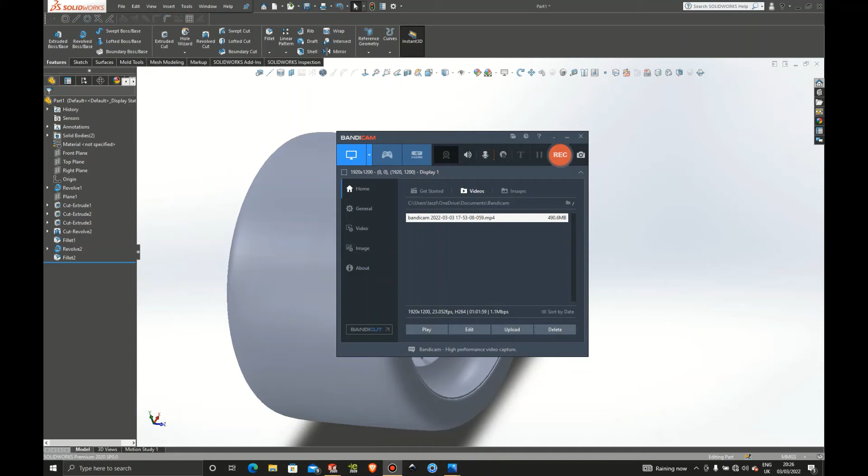All right, so let's continue with our rims and wheel. We now created our racing wheel. We still need to add some cuts on these tires to make it good. So let's get a section view here. Press OK.

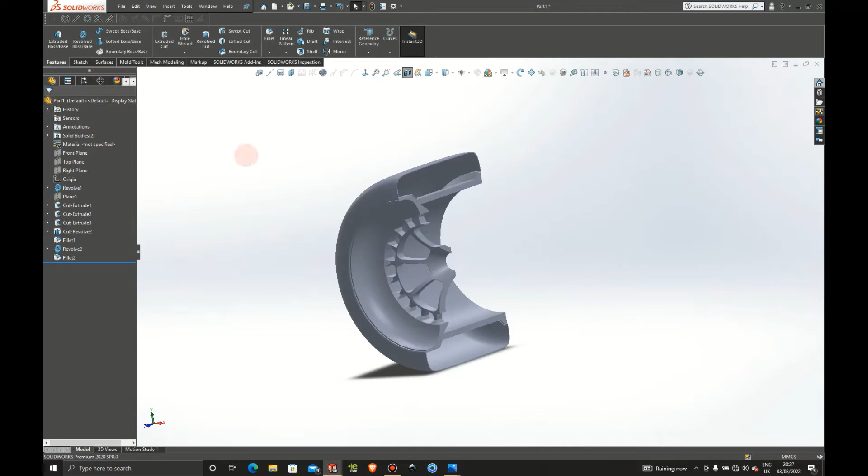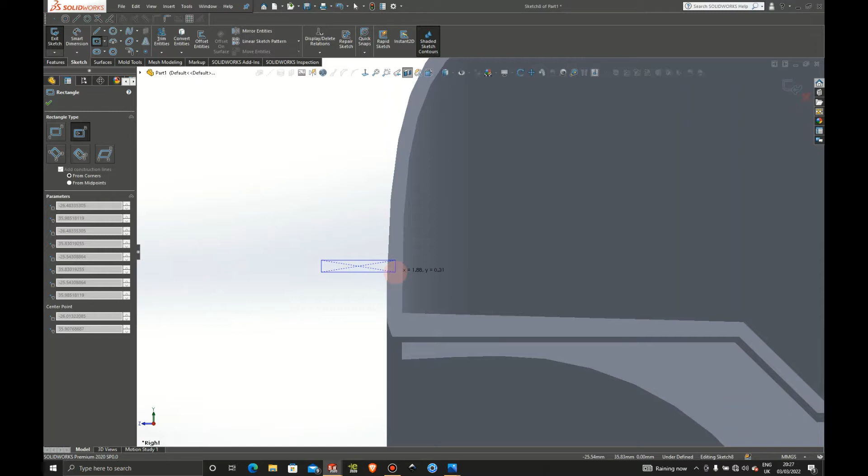Let's make a sketch on the right plane, normal to profile. We're just going to zoom in here, and then we're going to add a couple of center rectangles. We will cut into these wheel here.

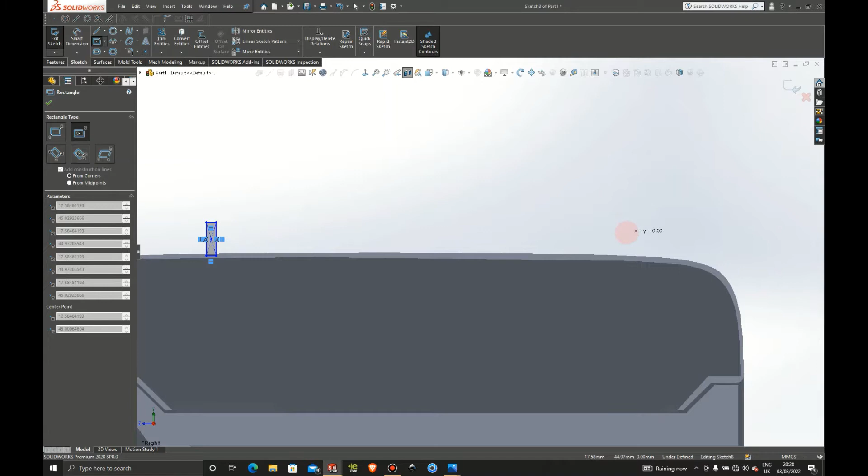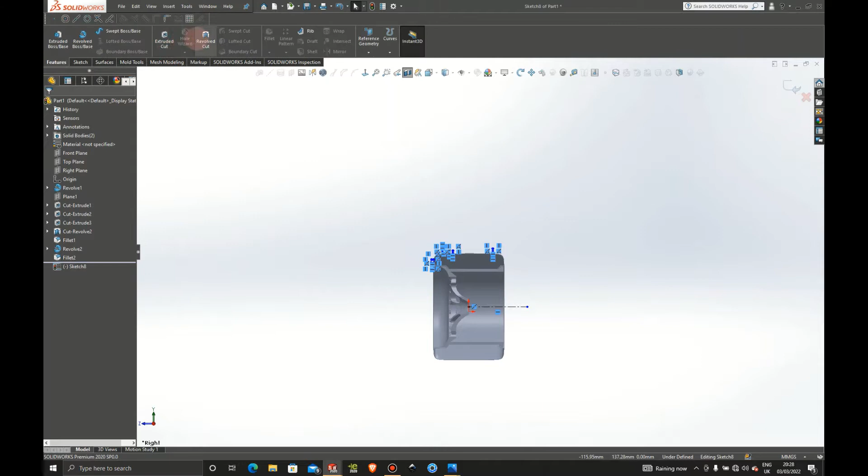And of course we need a center line to revolve this around, and a revolve cut. So let's go to features, to a revolve cut, and let's use this as an axis. All right, and if we take away the section view, now our tire is starting to take shape a little bit better.

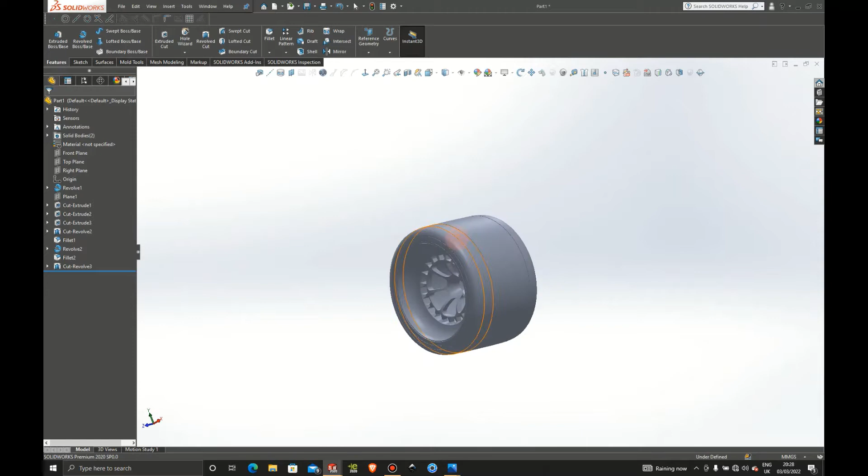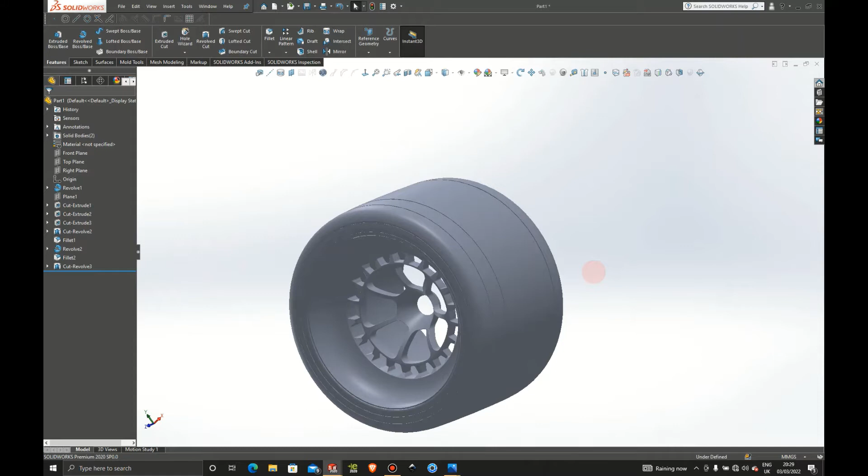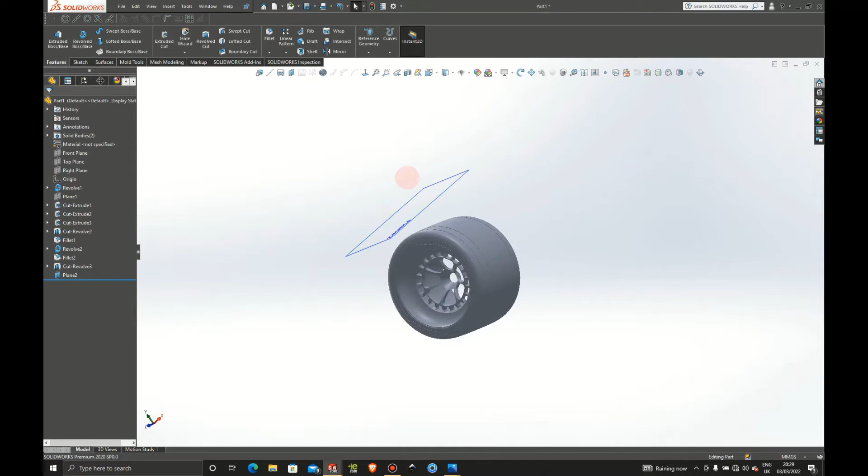All right, now we're just going to have to make some cuts that are going in this direction. To do that, what we're trying to do to create that kind of cut is make a sketch from the top plane. Actually, we're going to make our plane out of the top plane, somewhere there. And then we're going to make a sketch on this top plane.

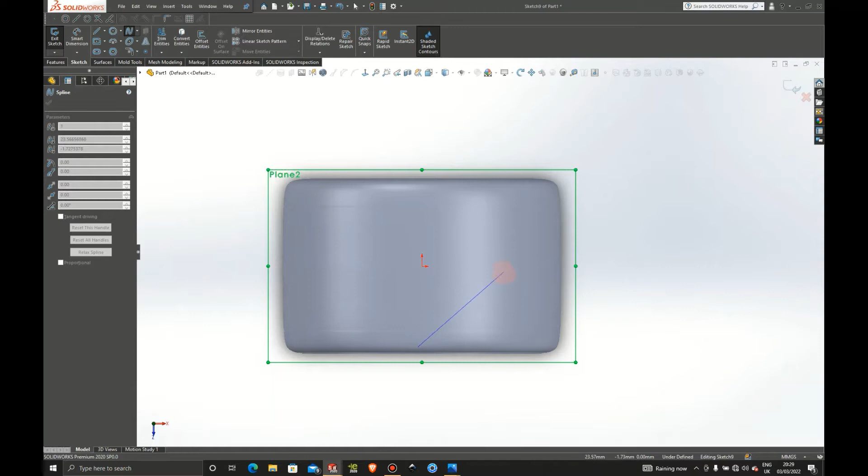Okay, let's grab a spline from here. That's the midsection, the middle right here, so a little bit away from the middle like that. And we're going to give this a little bit of profile. Then we're going to grab another spline and connect these points, following this same curvature in that direction.

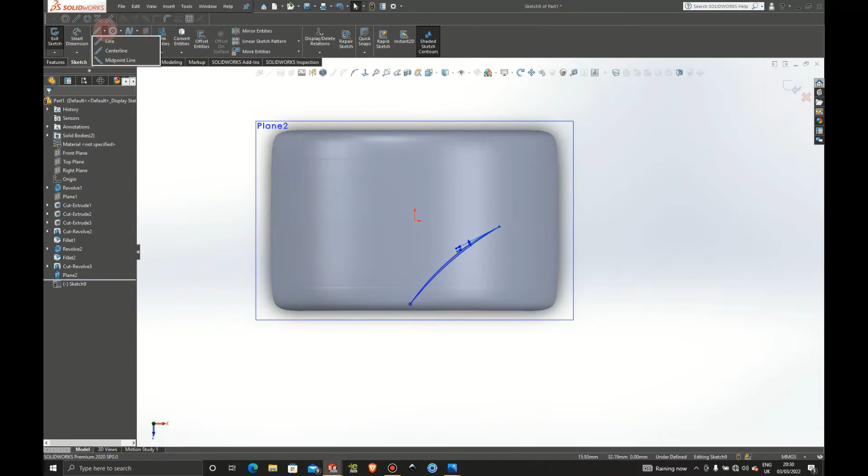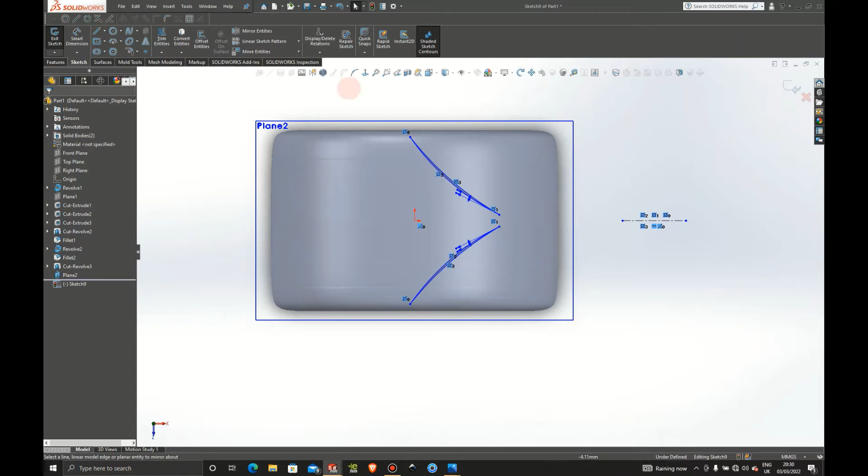Okay, and then I'm going to take a center line here. I want to drop it right on the center, and mirror this over to the other side, and mirror over here like that. Okay, and then we're going to try and do a deboss, hopefully. So insert features. But first, let's exit the sketch.

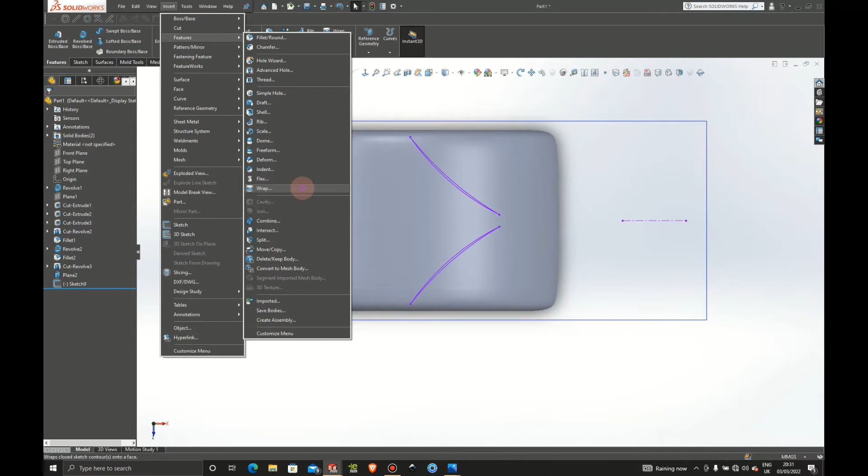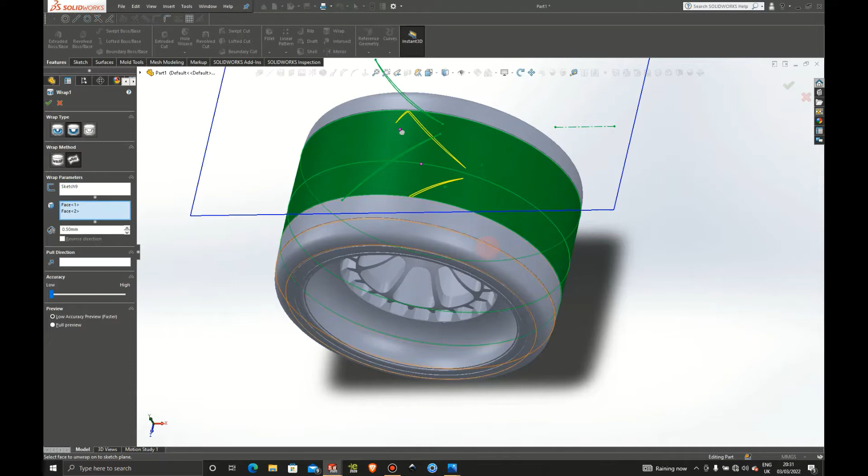Okay, now let's go to insert features, and then we can use a wrap. Let's select the sketch, it's going to be those sketches, and we're going to select deboss here. Our face is going to be the core itself, so let's just select all faces.

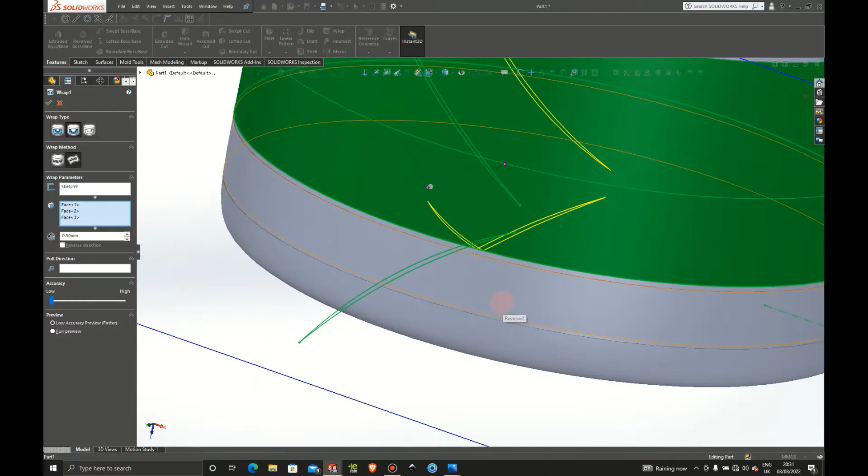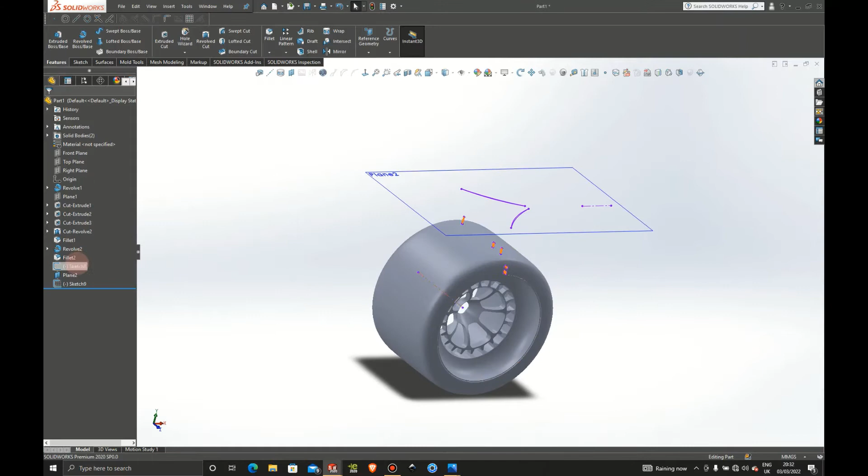Actually, we need to cut this groove afterwards because it's giving us some issues here. So let's go back into the feature tree, and we have this Revolve Cut here. We're going to delete that. That's good, and we're going to delete it. We'll probably leave the groove cutouts for now.

And let's go back again to insert features and wrap. Let's select our sketches, and let's select the face, the two faces. All right, and we're going to deboss that by 0.5.

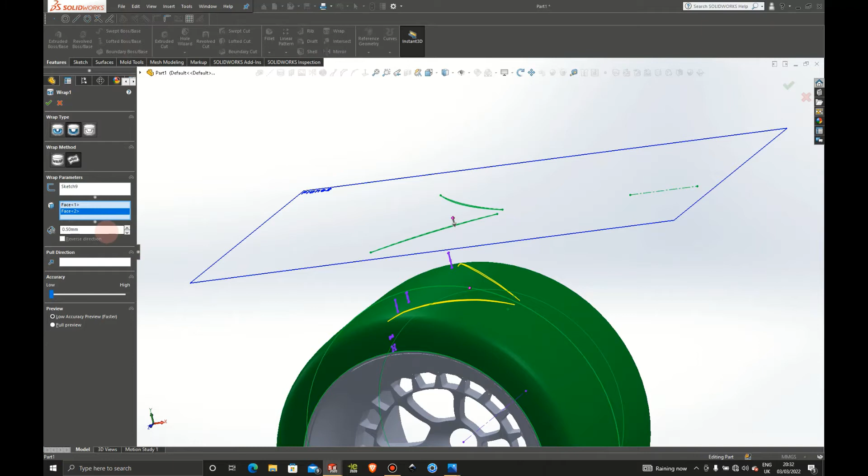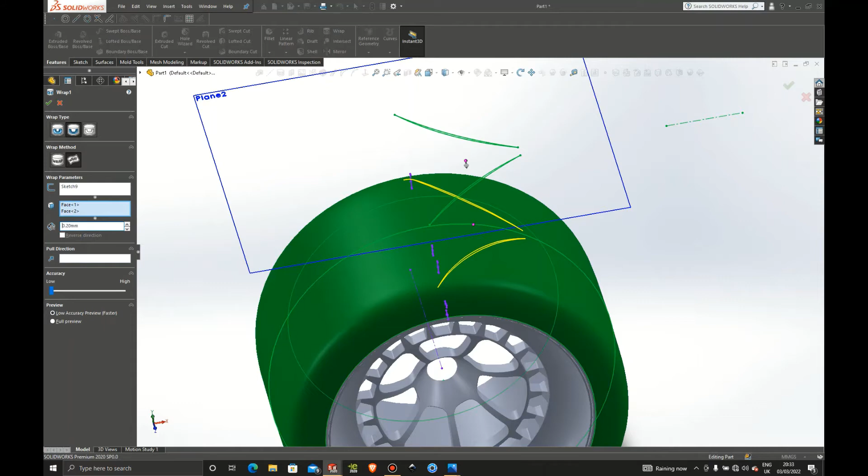Okay, let's have a look at this cut. So it looks like 0.5 is cutting right through the tire, which we don't want. So we're going to go back in here and edit that feature, and we're going to make that 0.2. Have a look. All right, so 0.2 looks perfect on that cut.

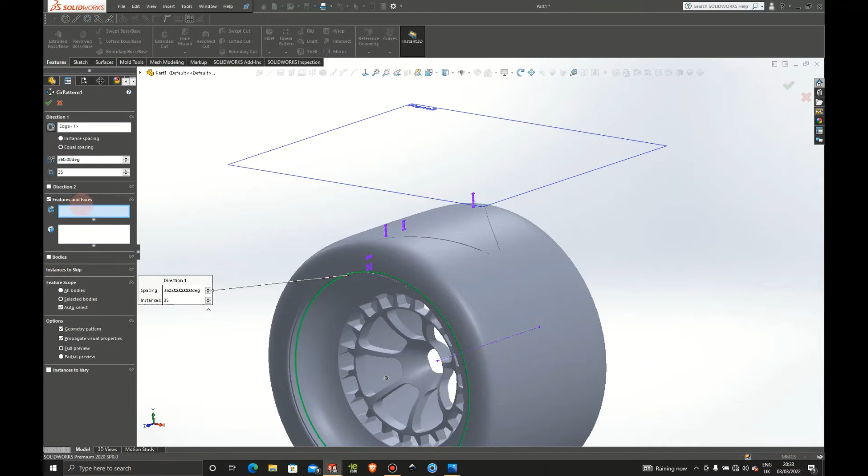Right, then all we're going to do now is go to circular pattern here, and for direction we're going to use this circle, or one of these edges. Clear the selections, and let's choose these cuts here, selecting from the feature tree, the wrap. So asking for 35 instances, and I'm hoping that is going to do it.

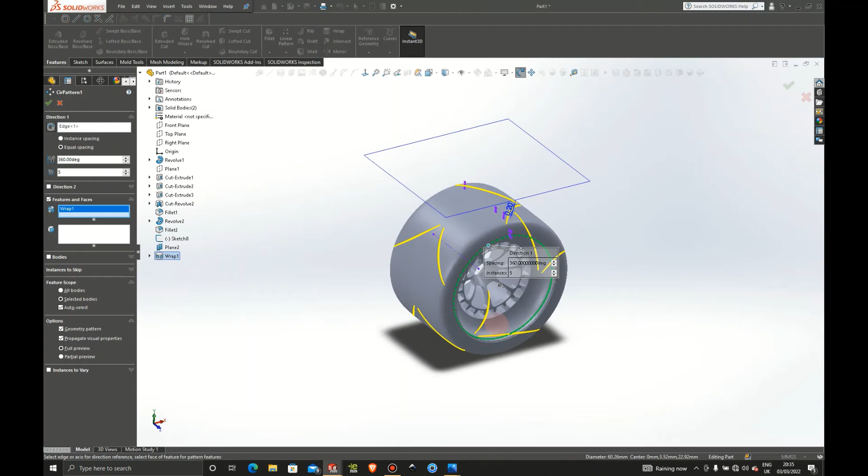All right, so if we choose 4 here, then we're just going to bring these instances up. So I want this to do more than 5, but I don't know why it's not doing more than 5.

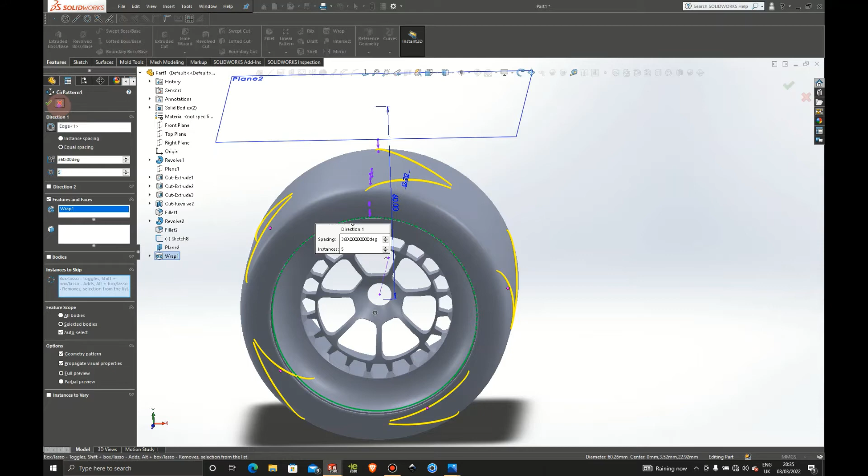So let's go do that again. Circle pattern, direction is this edge here, or this edge here. This edge, let's bring that down to 4. And for features, it's going to be the wrap. So it's doing 4 here for us. Press OK on that.

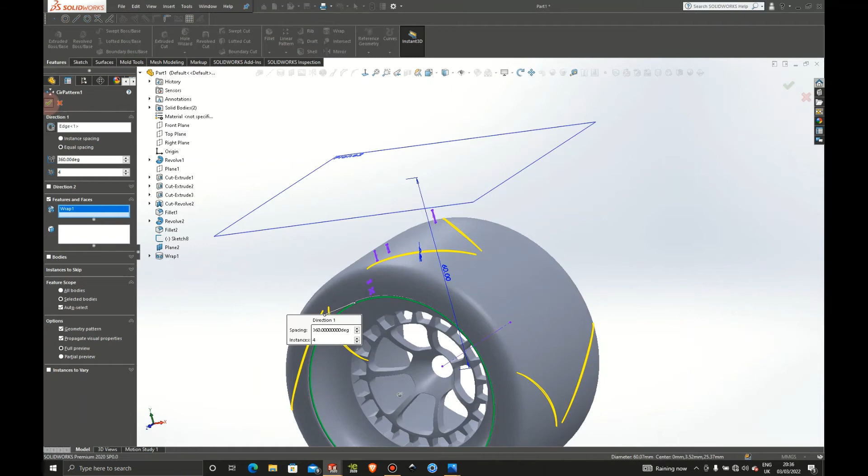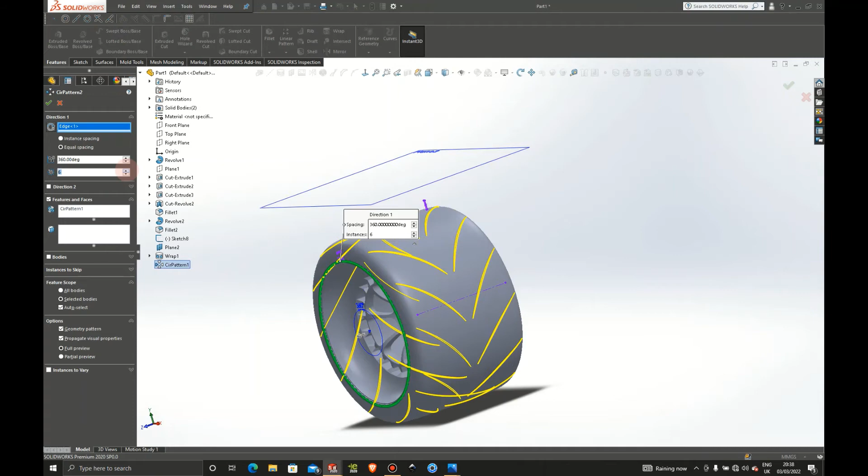Let's go back in here again and try to do it again. So let's select this. I want more than 4, but oh, there you go, that's much better. So now we have a lot better instances here. Let's try 6. All right, so 6 is the one.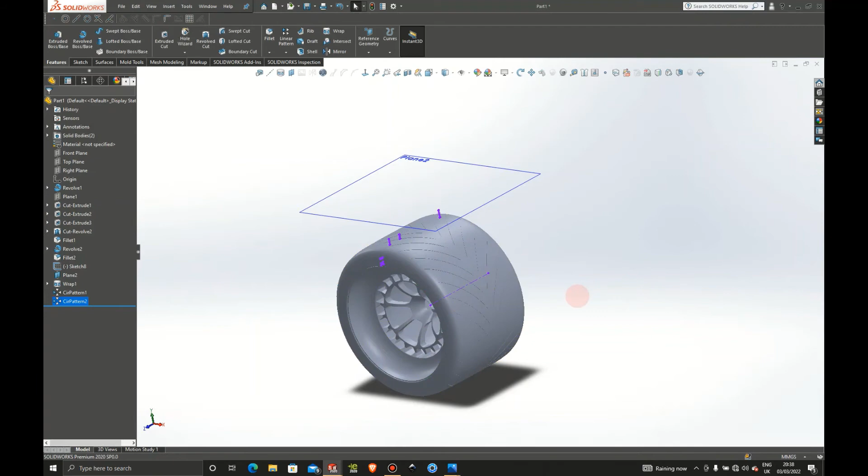Let's try 7 instances. Okay, so 7 looks a lot better. Press OK on that. All right, so now it looks a lot better, a lot more like a tire here.

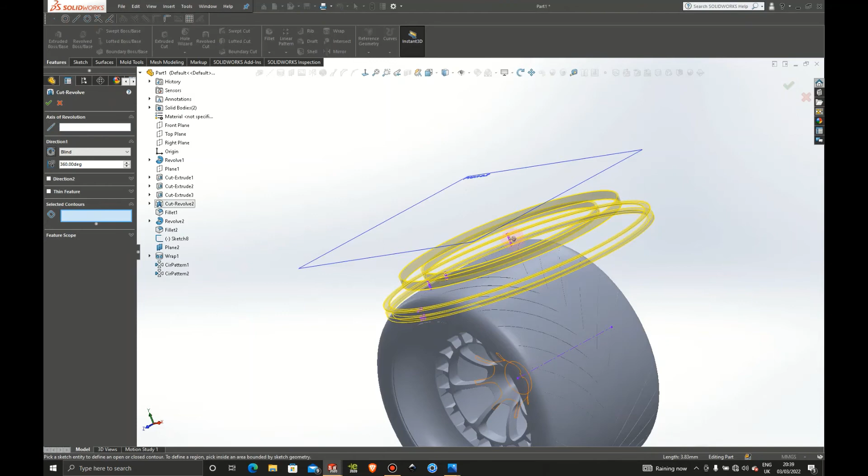And then all we have to do now is, again, we're going to revolve these around. So let's do a Revolve Cut. Let's select the sketch here. And axis of revolution, clear selection, and select contours, the contours being the sketches itself.

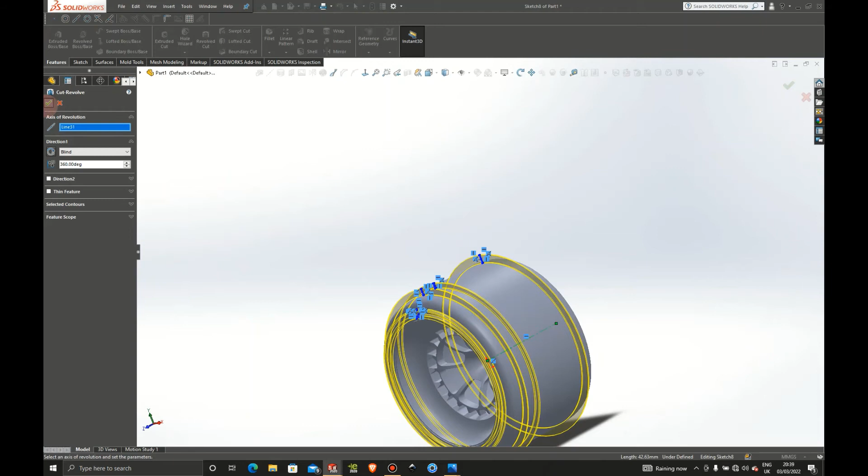Oh, let's do it this way actually. Let's go in here and edit the sketch. Okay, then let's go to features and do a Revolve Cut, and let's use these as the axis of revolution. Perfect, okay, so now we have the grooves and we also have the cuts on that wheel.

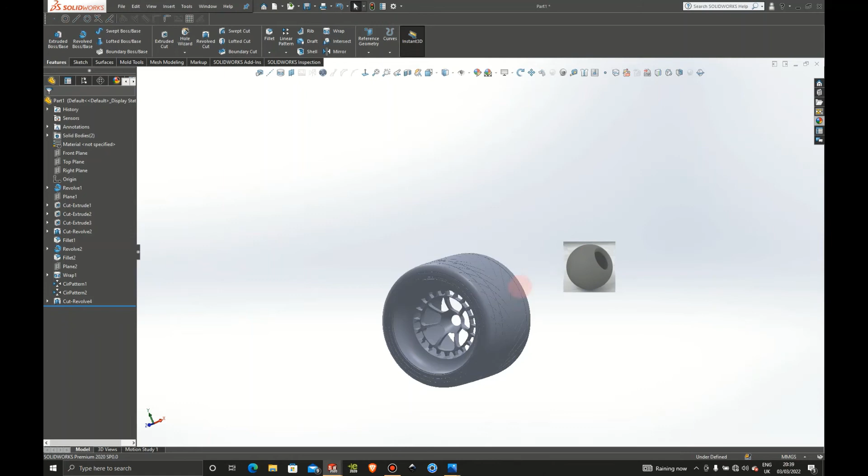And then all we have to do now is hide this plane here, and let's add an appearance. We're going to add rubber, matte. I'm going to add that on there. So that looks beautiful.

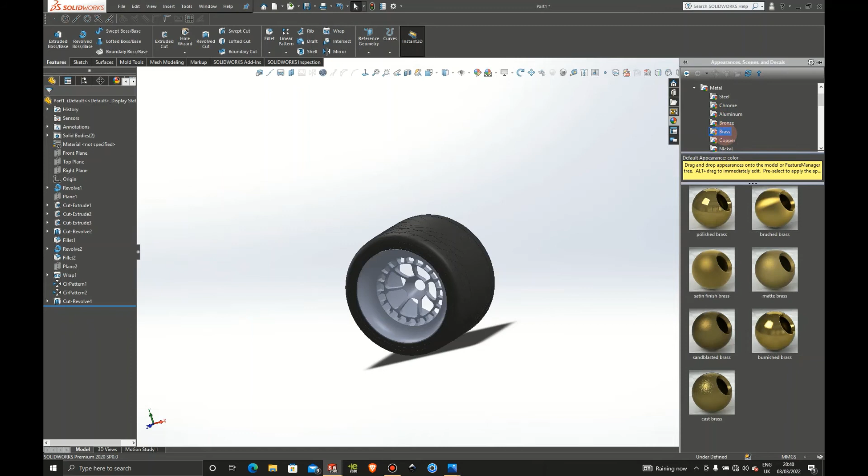Okay, let's add an appearance on the rims. Let's add, not plastic, but metal, right? And let's try chrome, maybe bronze, brass. Let's try brass chrome here. All right, that looks pretty good on the rim.

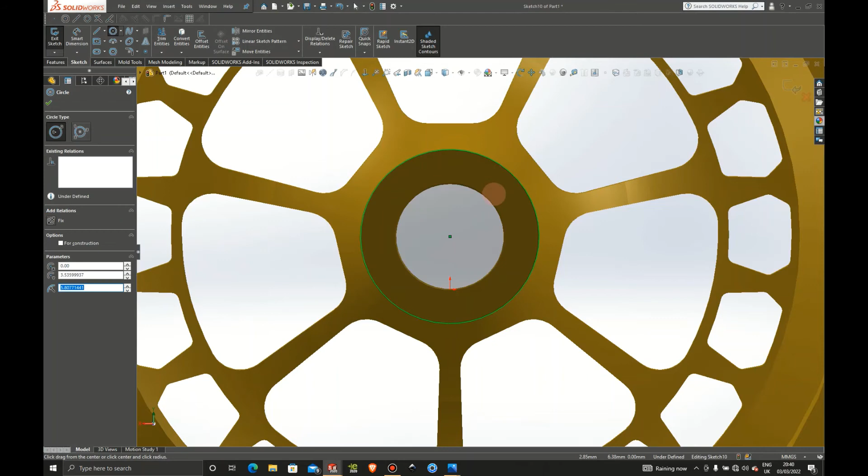Okay, and I just want to make this a little bit thicker here, so let's make a sketch here. Features, extrude. I want to give this a little bit of thickness, and make that maybe just 1.

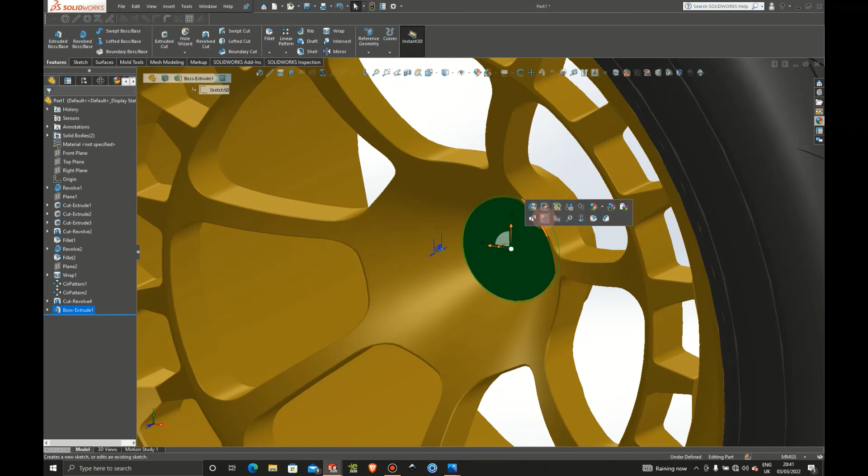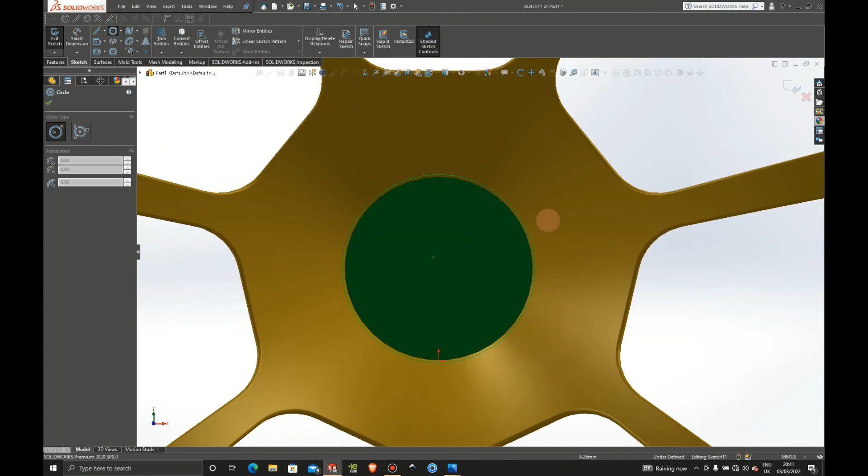Okay, and then we're going to make another sketch on this face, and let's cut that out. We want to find that center point, of course. Let's try to find that from this side. There you go, that's the center point right there.

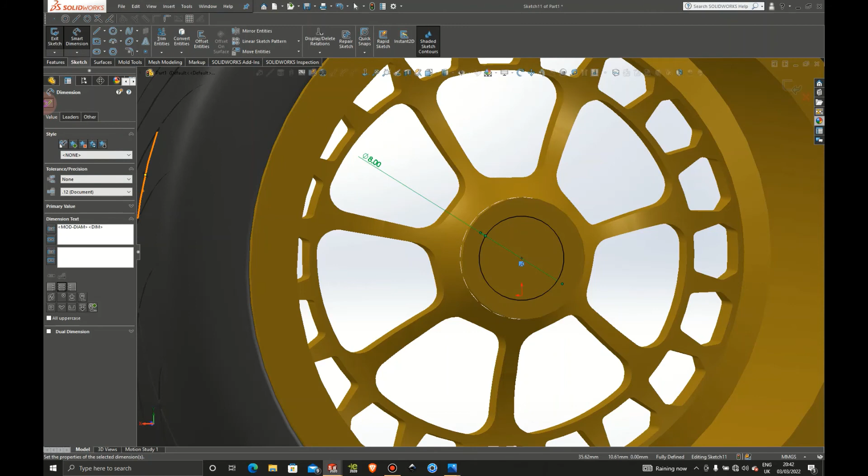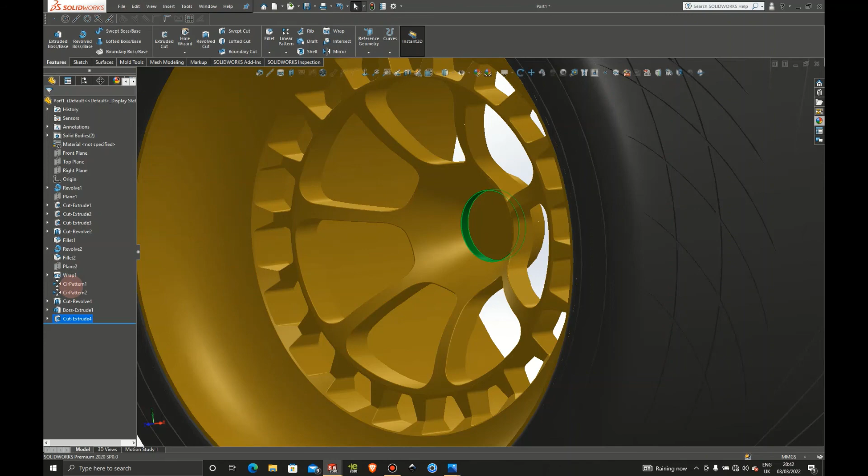And that should be 8, so make that 8. Let's do an extrude, I'm going to cut that all the way through. Of course, we made the drawing on this side, so we're going to have to edit that with the sketch, and let's turn it on the other side. All right, perfect.

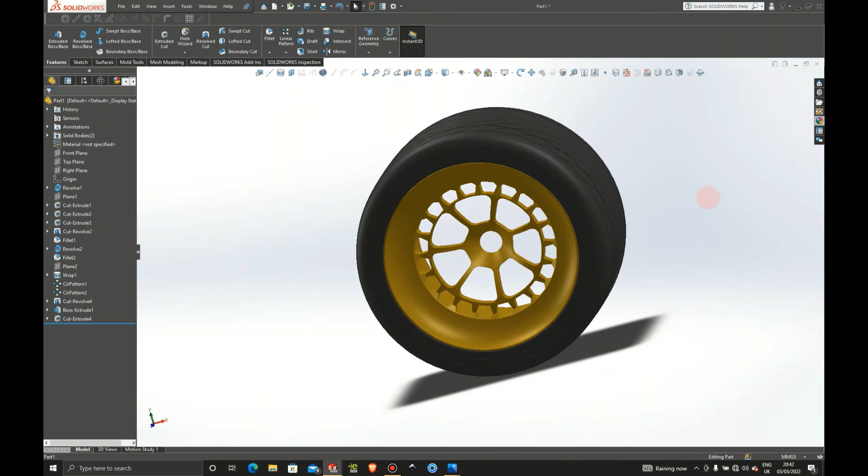All right, so that looks a lot better now. Okay, so I want to save this here. So let's go to save as, and I want to save it as a wheel. So Bugatti wheel. Save. Okay, so now we have the wheel.

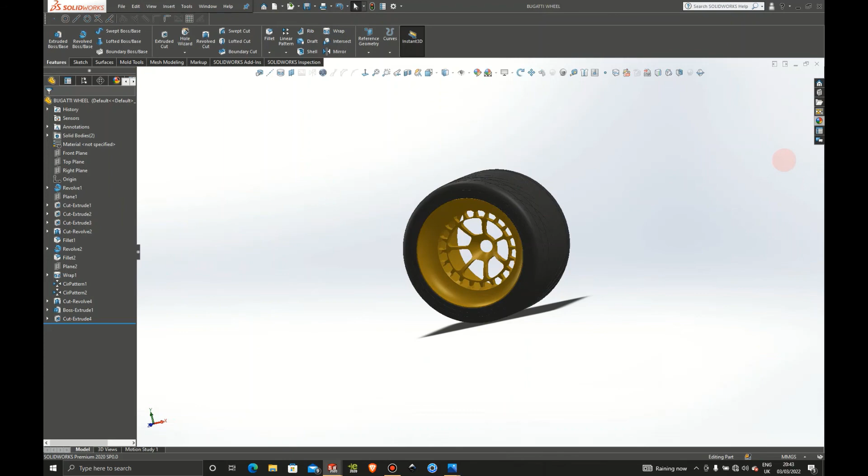All right, what I want to do next is exit from here, and I'm going to get into an assembly. So I'm going to press new, and I'm going to make an assembly.